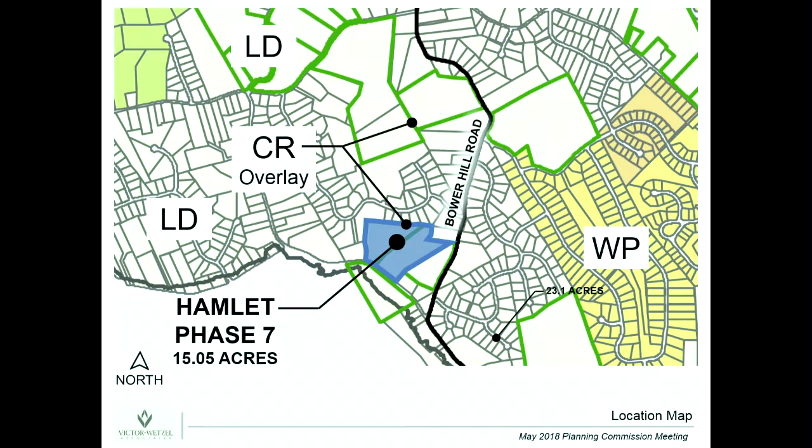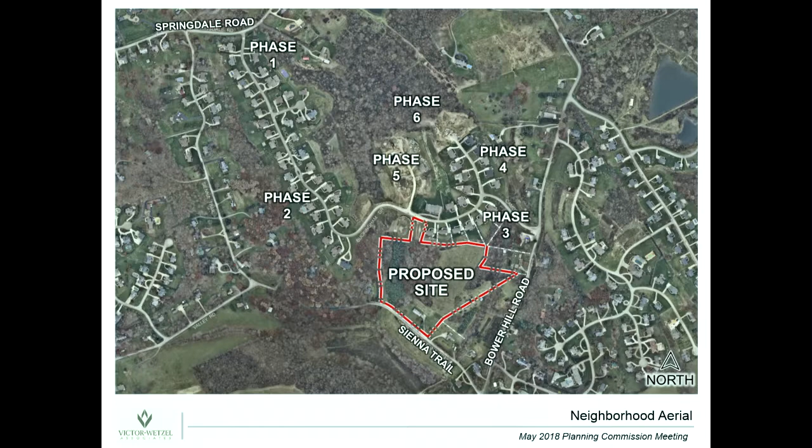As you can go through the neighborhood plan, this is once again Phase 7, with the proposed site located along and through here - Sienna Trail, Bower Hill, Springdale. When you look at the number of phases for Benjamin Marcus Homes, with the first phase through second phase, continued through the third phase and fifth phase.

And I think within the last year, Phase 6 has been approved over and along this section of the property. Now, in regard to the site, it's approximately 15 acres. Access would occur off of Buckingham Drive along through here. There's an existing detention facility located along this section, which will be expanded as part of this phase, but as Ed mentioned, utilizing an existing detention facility.

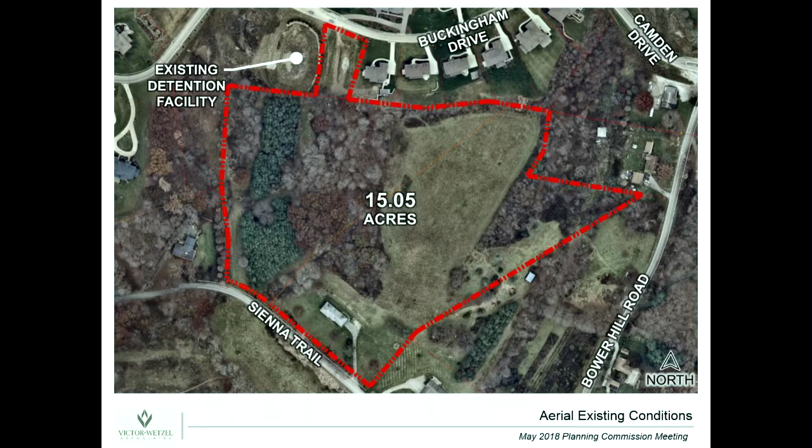You can see there are existing homes located along this portion of the property with access occurring along here. There's a combination of evergreen trees within the site, wooded areas, and an existing home that has access off of Sienna Trail through this section of the property. That house will be razed in the development of Hamlet Phase 7.

In regard to the topography, we have a high point within the site through here, falling down to a valley where we have a drainage way and a series of wetlands along through this section. This is also where the existing sanitary sewer is, and it extends up into the other phases. Once again, the existing detention facility is through this section.

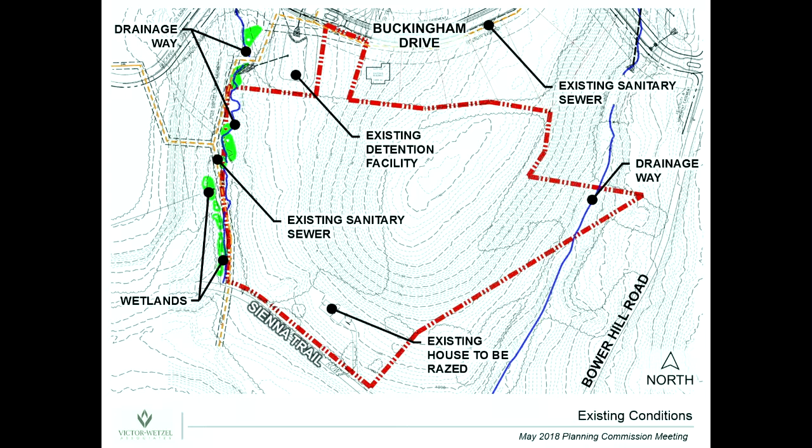Also, the site falls in elevation along through here with a drainage way that occurs parallel to Bower Hill Road, and then it also falls down to Sienna Trail. The dark contours are 10-foot contour intervals. The lighter ones are a 2-foot contour interval.

Now, in regard to the proposed CR plan, we're looking at a 21-lot conservation plan associated with about 65-foot wide lots. Access would occur along this section, within the plan in an oversized looped area. You can see the orange area, the lot areas, and the bright green area is the overall open space. Within the plan, we have a gross open space of 7.9.

When you take away some of the existing or proposed detention area, a lot that will occur in through here, will be at 7.5 acres of open space, or 50% of the overall site area.

In regard to the utilities, we have the high point really happening at the oversized looped section. All utilities will fall down storm-wise into the stormwater detention through here. Backyard storm sewers will go to the detention facility through this section, and the sanitary will be extended along the roadway through this section and along this area. So all utilities will be extended into the site underground, similar to all the other phases of the hamlet.

Now, in regard to the site, we also really do have within that central loop area an open space section through here, as shown in the previous plan. We do have crosswalks and a pavilion, a gazebo actually, that will occur along through here as part of the green space part of the overall site.

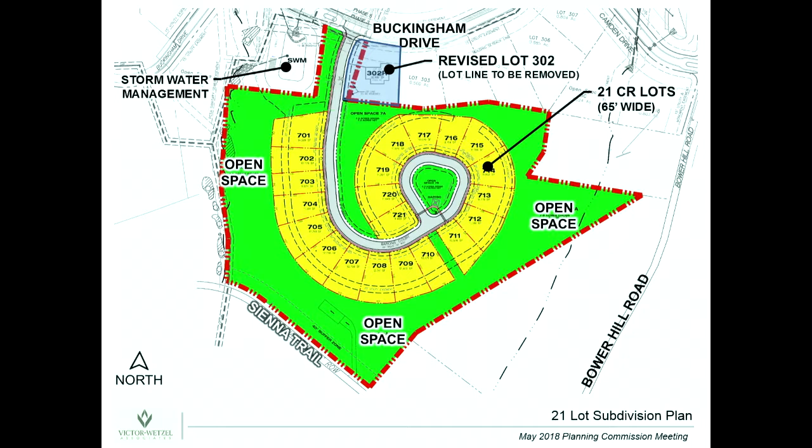Now, as Ed mentioned, we are looking for one modification, in regard to section 385-37(I)(1) regarding cul-de-sac length, maximum shall not exceed 600. Now, our number here does show 1,400, but really when you look at the past plan, that 1,400 took all the way around this loop.

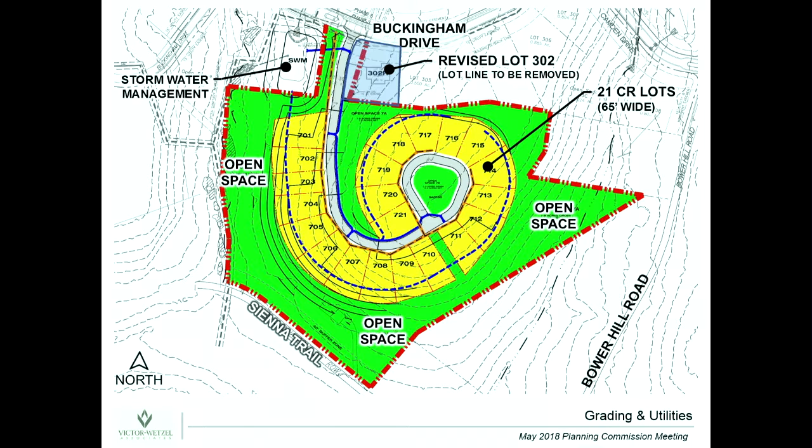If you come along through here, it's a little bit less than 1,000 to get to this point. As we said, we created the oversized loop through this particular plan. But really what we're doing is looking for that modification to allow that extension, because topography-wise, it's not possible to get down to Sienna Trail due to topographic issues.

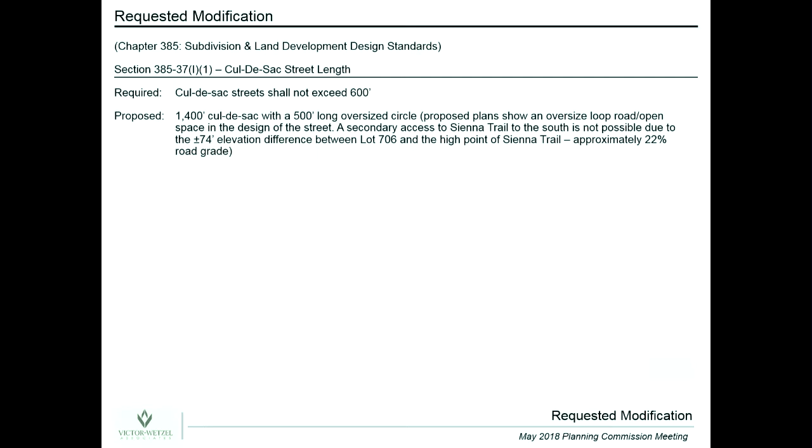So when we look at that, between this area we have about a 74-foot elevation change that occurs from here down to Sienna Trail Road along through this section. So if we would put a road in, that'd be about a 22% road grade, so it really isn't feasibly possible. And as we showed with the one map, we do have a considerable number of other ways out of the hamlet plan.

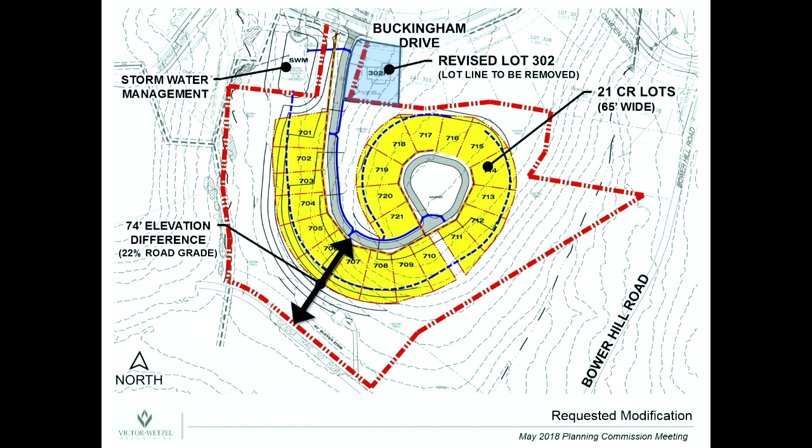So it makes ideal sense to lessen the disturbance in regard to grading and create more of a private neighborhood cul-de-sac, but more of an oversized cul-de-sac with a green space within the plan. In regard to the landscape plan, we'll have the required number of street tree plantings within the center area, once again highlighting the gazebo located here at the intersection.

We also provide buffer areas along the property line through this section and along this area. Now, one thing regarding this plan, we have the existing lot 302, which has an existing house. They'll gain additional property area by the right-of-way through this section. Mark Hoskins has had several conversations with the property owner about this plan. Actually, he's very excited to have more side yard space, and he's aware that this plan is going to take place and what he's going to achieve through this section, as well as knowing that this property would be somewhat developed in the future. But once again, we have the required buffer areas along Sienna Trail as well as along the existing lots, and large areas of existing trees within topographic sections of the site.

When we look at the CR zoning versus Hamlet 7, the uses allowed are single-family detached, and we're using single-family detached. There's no minimum lot size, but our minimum lot size is 8,714. The minimum lot width allowed is 50; we're at 65. Our front yards will be 20-foot minimum, 25-foot max. Rear yards will be 20-foot, meeting the requirements, as well as side yards of 7.5 feet on each side. Maximum building height will be 37 feet. And the density allowed here is 2 dwelling units per acre; we're at 1.4 dwelling units per acre.

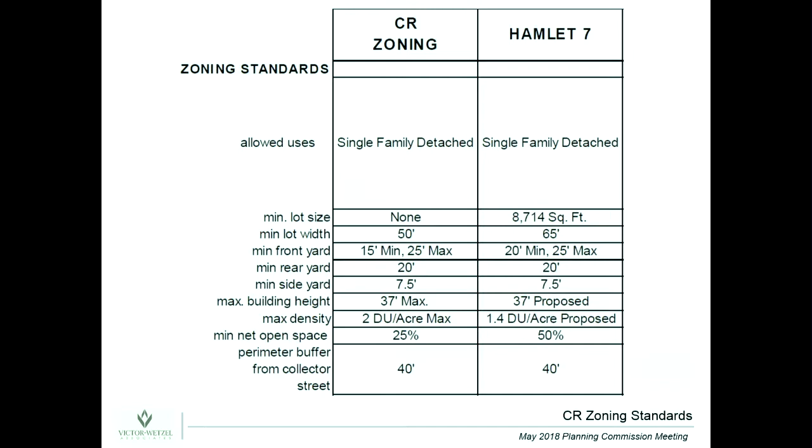We're required to have 25% open space. As I mentioned, we have 7.5 acres of open space, which is 50% of the site, and we did show the buffers along the collector streets.

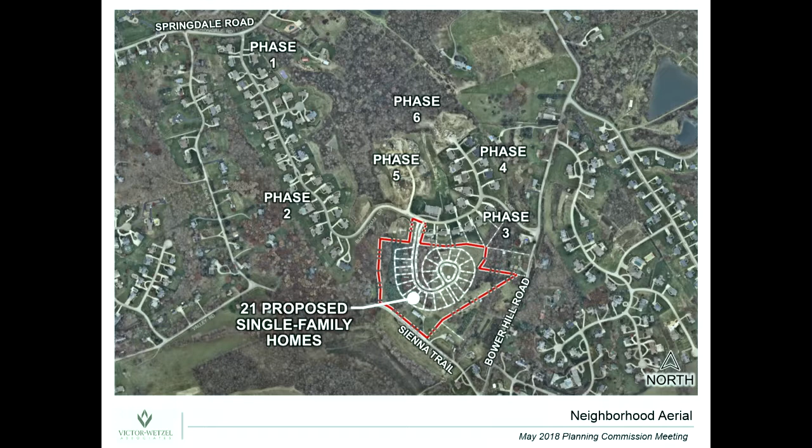So this is the overall master plan for the hamlet, with phase 7 occurring along and through this section. Once again, access will occur along and through this side, and over and through this area. So we're here tonight seeking preliminary plan approval for Hamlet Phase 7 for 21 CR lots associated with this plan. Glad to answer any questions the board has.

We did receive comments from Mr. Zook regarding staff comments. We had no concerns with any items, and we can address them with the revised submittal after, hopefully, a recommendation from the Planning Commission to go in front of council.

Did the traffic impact fee get grandfathered under the old rate? They are entitled to the fee that was in place when they filed their plan for review. Any new plans filed from that point forward have to use the new fee, which is $1,500 instead of $1,386.

Between lots 710 and 711, there's a space in between. Is that for a possible future road there? Oh, no, it won't be for a future road. In fact, that's too narrow. That's just more of an open space access.

The cluster mailbox requirement that all new developments have to have, we need to think about where that can be and design it so folks can easily access it and not walk the road. I didn't include that as a condition, but I want that added. Not a problem. We'll add our cluster location when we do our next submittal, number 12, correct.

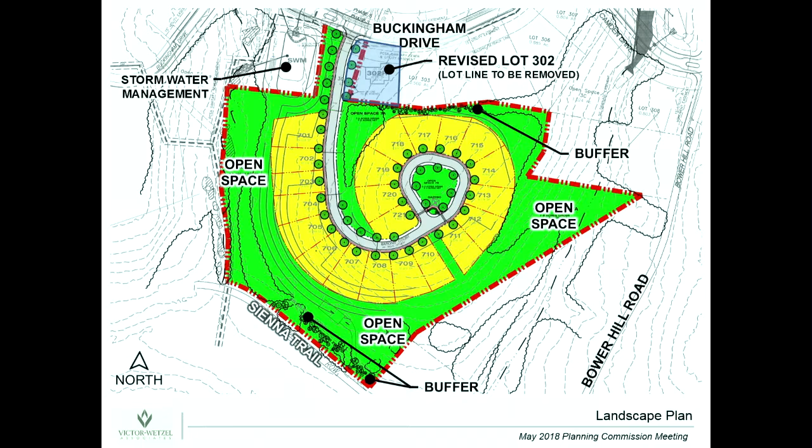What's the roadway cross-section? Is that sidewalks on both sides? What we have, because we don't have any frontage of lots on this side, is a sidewalk located along the entire length of this side all the way through. But one of staff's comments is to provide a sidewalk within the loop, correct, Ed? We can modify that condition so the preliminary and final plans include sidewalks on both sides of the loop. We'll add sidewalks through here, but we have sidewalks on one side all the way along through here, and we'll add that. There will be two crosswalks located right along through here.

Any other commission comments? Any audience comments? All right, any motion? I'll make a motion.

Oh, hold on one second. Do we need to make two motions? One for the plan and one for the modification, or can we do one? I think we could do one, including the planning commission's opinion on the modification in the motion.